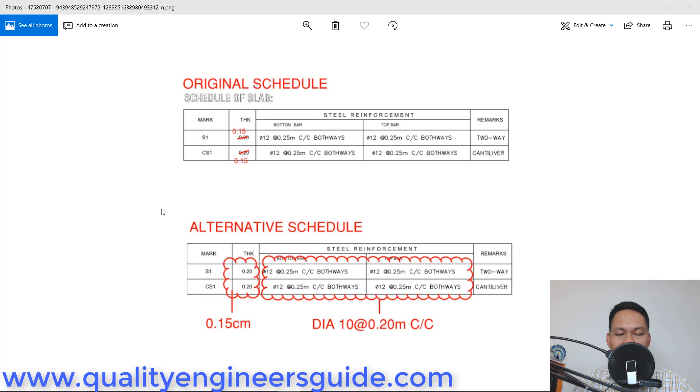By the way, this project is a two-story apartment building, and we're going to construct now the first floor. So now I'm gonna show you how to check or lay this on site. Right? So more on that after the intro.

All right, guys. So welcome back. Now, this is the new design for our slab sent by our structural engineer. So let's just zoom out. Why can't we zoom out? Right, no problem.

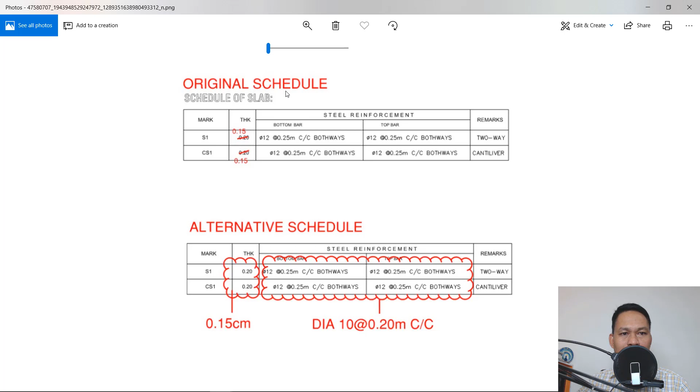Right, it's here. So here, as you can see, he erased the previous detail. It was 0.20. S1 is a two-way slab. That's why it was designed at 0.20 meter thickness. So now he redesigned the slab. It came out that it is still safe at 0.15 meter thickness or 150 mm.

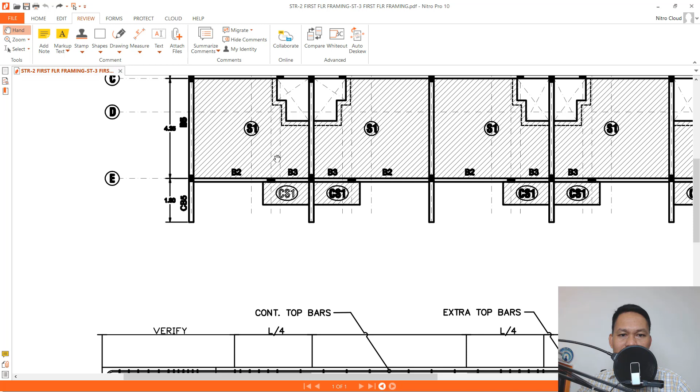Right. So I'm gonna show you S1 right here. Let's go to our PDF. Let's drag down. Right, so it's very slow. So as you can see here, this is S1, meaning two-way slab, and we have here CS1. So this time, we are going to discuss the reinforcement for S1 and how to lay that on site.

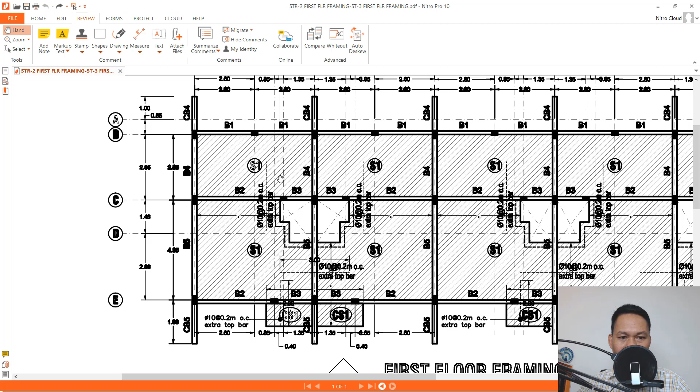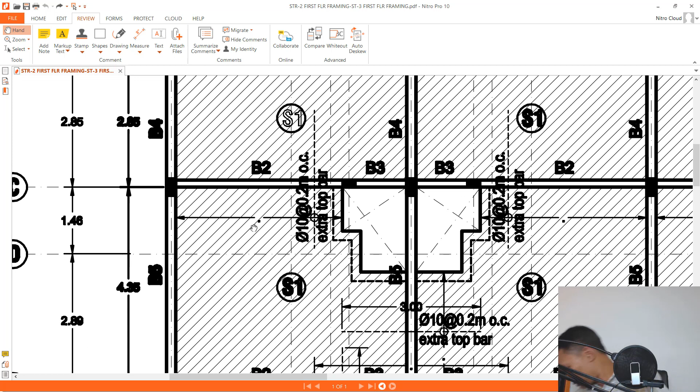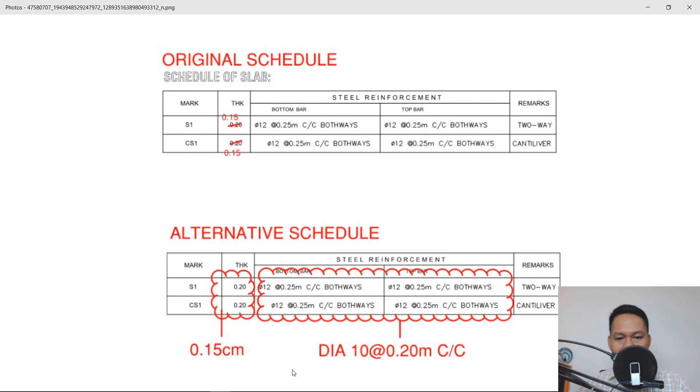Right, let's zoom out. So here it is. Right, this PDF viewer is very slow. All right, so that is our new design. He has also given the alternative schedule, which is 150 mm thickness of the slab, and here we can use slab reinforcement of 10 mm diameter, spaced at 0.20 meters center to center.

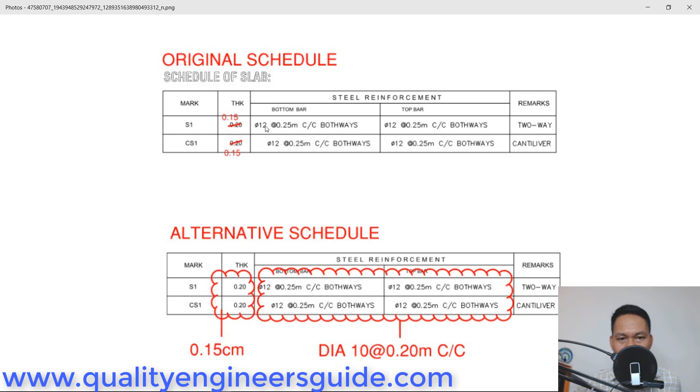Right, because the previous design was 12 mm diameter. As you can see, let us blow up here. Right, 12 mm diameter, this is the sign of diameter, and then spaced at 0.25 meter or 250 mm center to center, both ways, meaning horizontal and vertical. So we will show that on our drawing, and I will also show you the photo of our slab and how the steel reinforcement was arranged and laid on the slab, right?

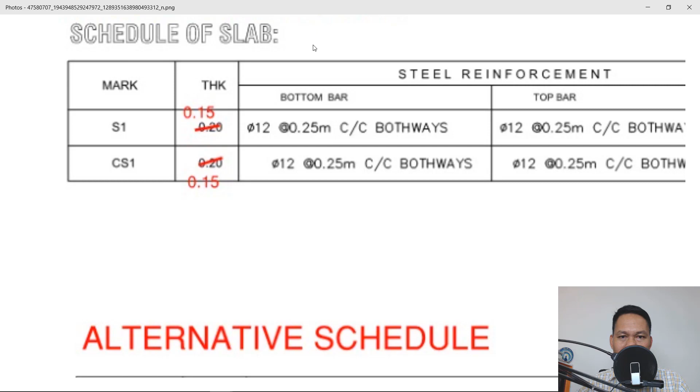So as you can see, let's read this schedule. Right, so here it is. Schedule of slab steel reinforcement. We have bottom bar. So I prefer to use this schedule of the slab reinforcement, but our thickness is 150 mm, and we have bottom bar of the slab 12 mm diameter at 250 mm or 0.25 meter center to center, both ways, meaning x and y direction.

So you have top bar also, meaning this slab is reinforced with 12 mm diameter top and bottom, right. So as you can see here, we have top bar also 12 mm diameter at 250 mm or 0.25 meter center to center both ways. So how are we gonna lay this on site? Okay, let me show you the drawing detail.

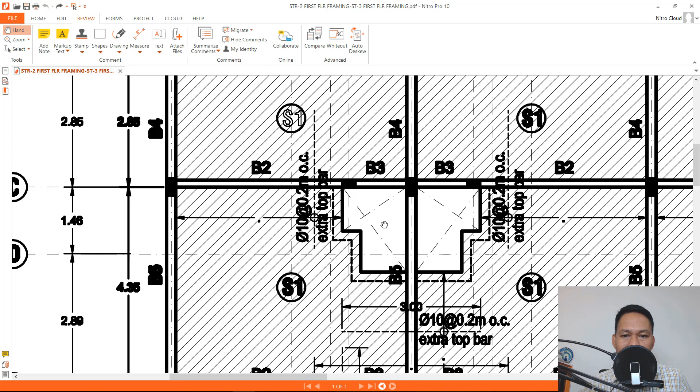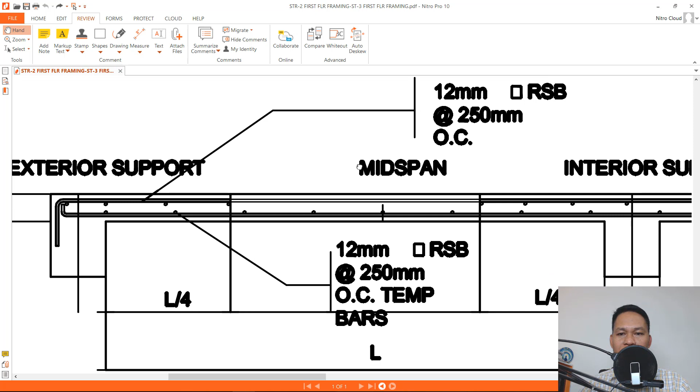Let's go down to our typical slab detail. As you can see here, we are now on slab details. This is the section, right? So as you can see, let's go to the bottom. This is the bottom bar. It says 12 mm diameter at 250 center to center, right? So this is the bottom bar, as you can see here on our design or schedule.

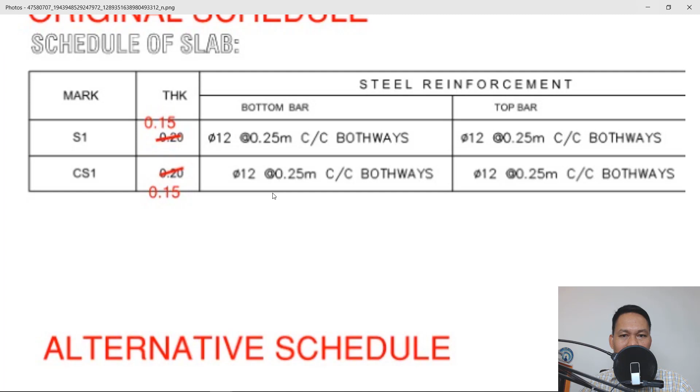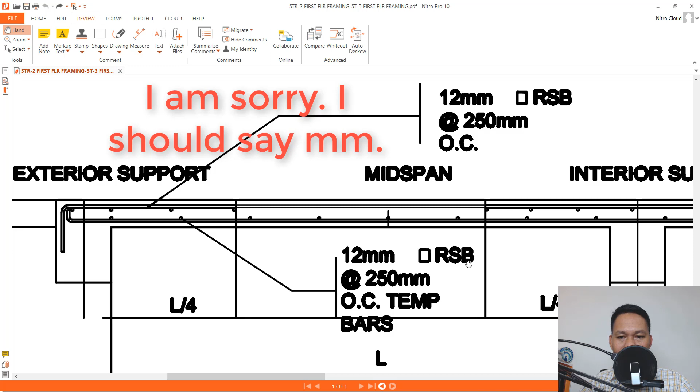So this is the bottom bar, and as you can see, the diameter RSB or reinforcing steel bar at 250 on center, right guys? This is bottom bar both ways, meaning this one is the y coordinate and x coordinate, if you see the plan view of this slab, right?

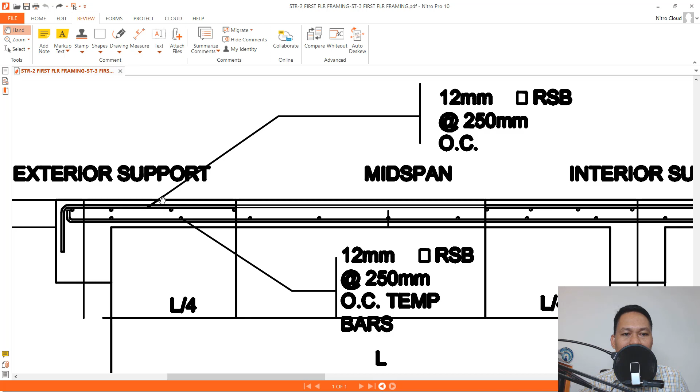And we have top bars also, right? As you can see in our schedule here, top bar same 12 mm diameter at 250 mm center to center both ways. Here the remarks, two-way slab, right? So here it is. This is our top bar of the slab. As you can see, 12 mm diameter reinforcing steel bar at 250 mm on center, right here. Both ways, meaning this one and this one here, right?

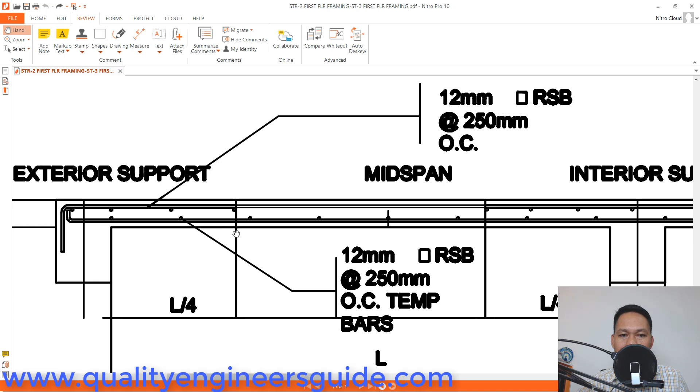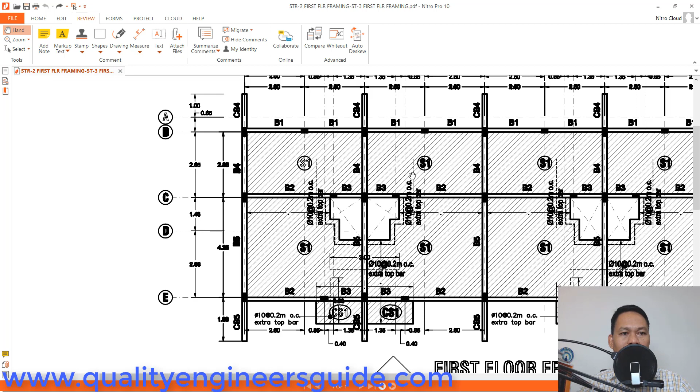So now I'm gonna, let's go up and let's draw some lines on our slab, right here. Let's reduce. Okay, right here, let's draw the reinforcement. Right here it says 12 mm diameter, spaced at 250 mm. So it will be laid like this. Why is it not straight? Let's undo. Right, so it will be like this.

Draw, insert. Alright, so like that. Let's say, for example, these are the bottom bars. These are the bottom bars spaced at, so just imagine that this is 250 mm spacing, right?

Because I'm just drawing from my hand, right? So just like that. So bottom bar one way, yeah. So it is said in the schedule both ways, so you will also lay like this, right? So that is the other way, right? Okay. All right, so I hope this is clear, guys. Sorry, this is by hand. All right, so that's it.

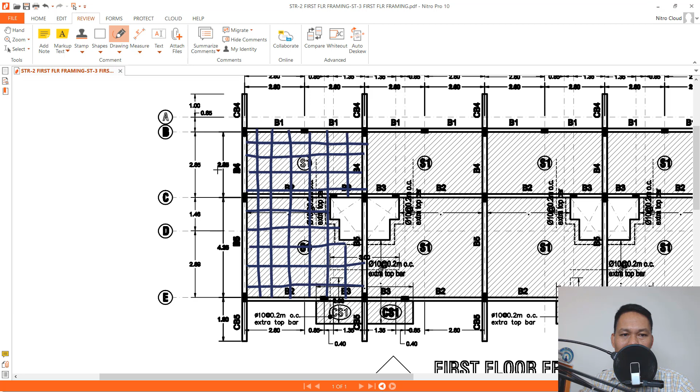All right, so that's how you're gonna lay, and the same thing with your top bars, right? You'll make the same pattern, right? So don't forget also the hook on the beam, as you can see here on our slab section here, right? So there is hook. Okay, and also the bottom bars, it is hook. All right, so you can see our thickness of the slab is 150.

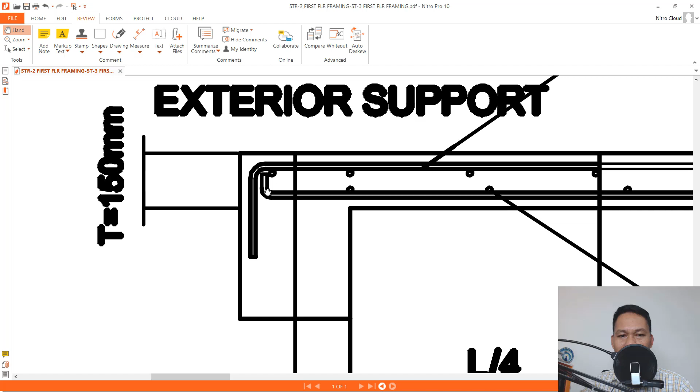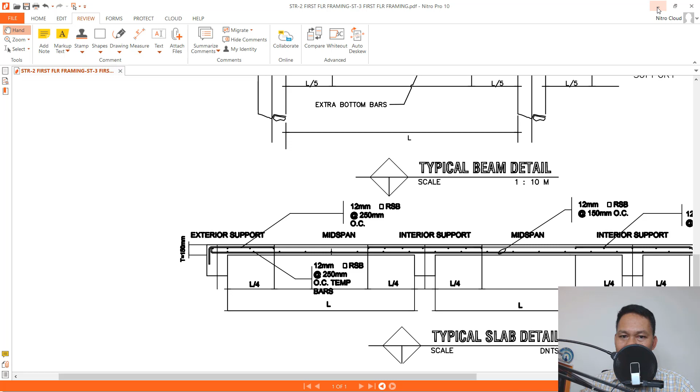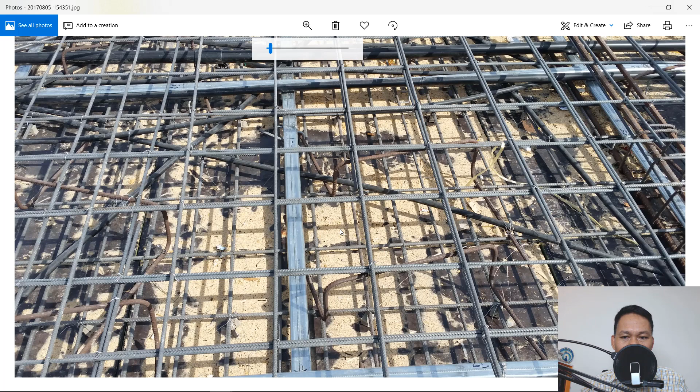And don't forget the concrete cover of the bottom bar. Make sure that there is 25 mm concrete cover. Tell the foreman to provide concrete cover, and make sure before casting, see to it that the concrete covers are all installed in all the areas, right? And then now we're here at top bar.

As you can see, we have Y and X top bars spaced at 250 mm. As you can see, 250, 250, right? Both ways. Again, if I'll say both ways, it is X and Y, right? So this photo is only for the purpose of presentation. As you can see, there is a lot of sawdust. It is not yet clean, right?

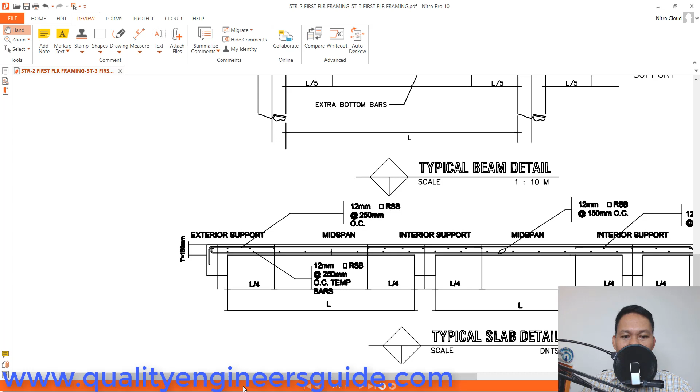So, right, I hope guys I delivered to you all the important things that we need to cover, right? So what else? Let's go back to our drawing. All right, I think that's it. All right. By the way, before we end this video, the beam, as per the structural engineer, there will be no changes of the reinforcement of the beam, only the size of the beam. I'm going to show you the PDF file which the structural engineer sent to us. Here it is.

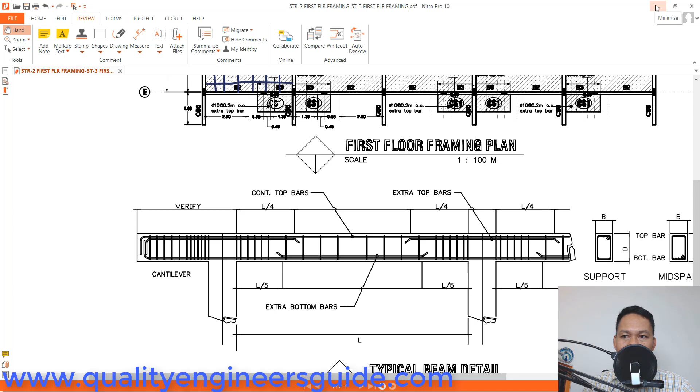All right, as you can see here, oh, where is it. As you can see on this new design, for the beam 2 it was 50 centimeters. Now he changed to 20. So this one is 20 by 40 now. And B3 also changed to 40. It would be the same size here in this beam. As you can see also the B2 and B3, he made them the same size of beam, 20 by 40.

All right, others are the same. Remember, the change is only the size of the beam but not the reinforcement. All right, just follow the original details of the reinforcement of the beam. Right, so that's it guys.